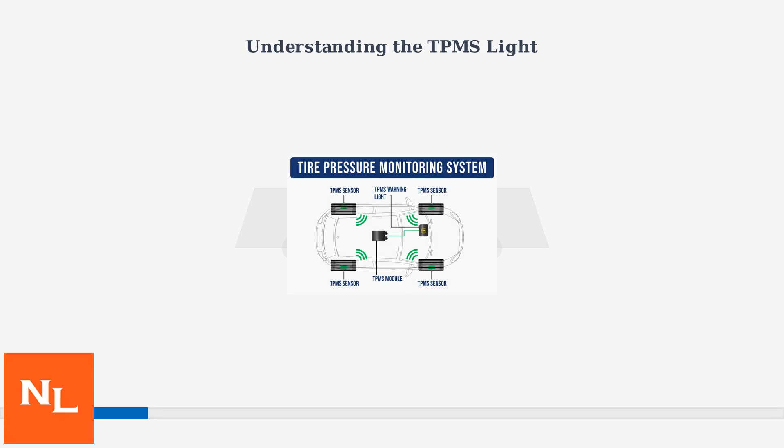The Tire Pressure Monitoring System, or TPMS, in your Toyota Tundra continuously monitors the air pressure in all four tires. When the TPMS light illuminates on your dashboard, it means the system has detected that one or more tires has pressure below the recommended level, typically 75% of the proper pressure. The light can also activate if there's a malfunction in one of the tire pressure sensors embedded in the wheels. Each wheel contains a sensor that wirelessly transmits pressure and temperature data to the vehicle's control module.

The Toyota Tundra uses direct TPMS with sensors embedded in each wheel that measure pressure and temperature, transmitting data wirelessly to the vehicle's ECU. These sensors communicate wirelessly with the vehicle's engine control unit to monitor tire conditions in real time. The TPMS light activates if any tire drops below 75% of the recommended pressure or if a sensor fails.

Regular resets may be needed after tire rotations, replacements, or pressure adjustments. Always inflate tires to the pressure indicated on the door placard before resetting.

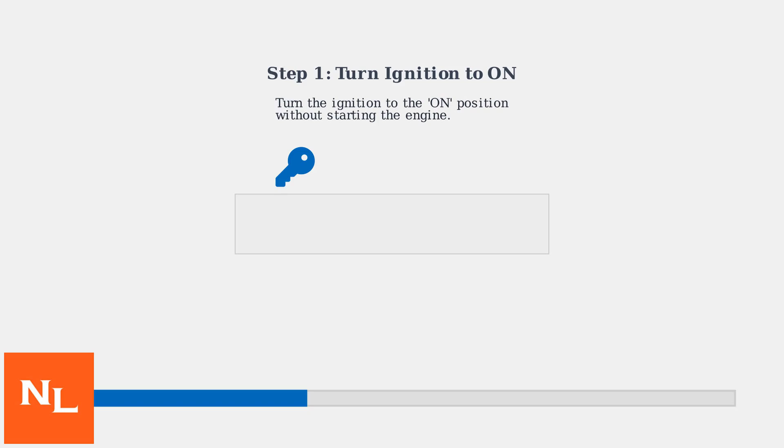For Tundra models from 2007 to 2021, start by turning the ignition to the on position without starting the engine. Next, locate the TPMS reset button. It's usually found near the steering wheel or inside the glove compartment. Press and hold the reset button until the TPMS light flashes or you hear a beep. This typically takes 5 to 10 seconds. Finally, drive the vehicle at 25 miles per hour or faster for 10 to 20 minutes to complete the reset process.

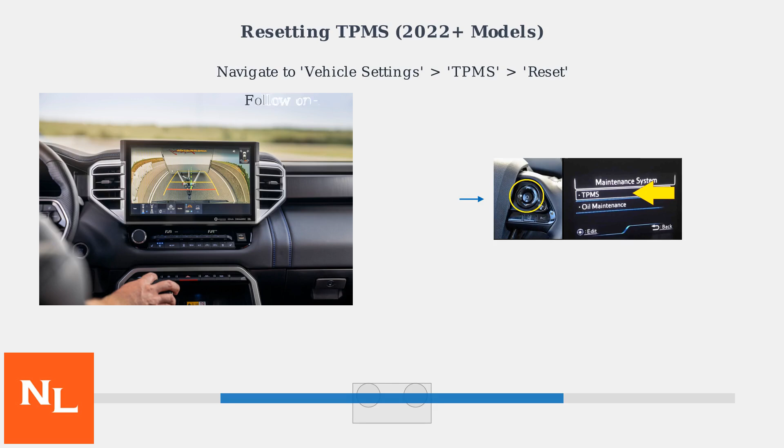For 2022 and newer Tundra models, use the infotainment screen to reset the TPMS. Navigate to Vehicle Settings, then TPMS, then select Reset. Follow the on-screen prompts to initiate the reset. After initiating the reset through the infotainment system, drive the vehicle at 25 miles per hour or faster for 10 to 20 minutes to allow the system to recalibrate.

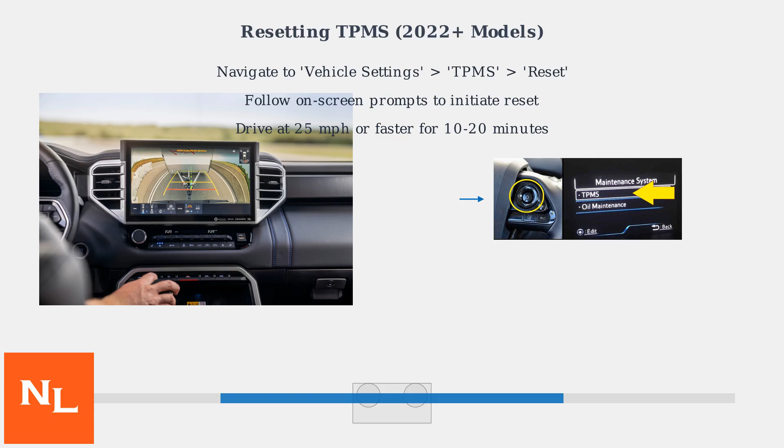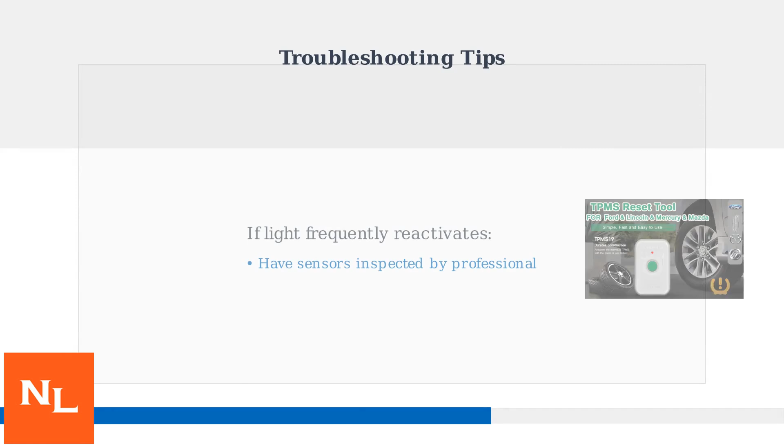If the TPMS light persists after resetting, it could indicate a faulty sensor or a tire leak. Check all tires for punctures or damage. Sensor batteries typically last 5 to 10 years. If the light frequently reactivates, consider having your sensors inspected by a professional. Some aftermarket TPMS reset tools can help diagnose sensor issues.

When resetting the TPMS on your Toyota Tundra, avoid these common mistakes that can prevent successful resets or lead to safety issues. First, failing to inflate your tires to the correct pressure before resetting is a common mistake. The TPMS system needs tires at proper pressure to calibrate correctly. Check your door placard for recommended PSI and inflate all tires before starting the reset process.

Second, using the incorrect reset procedure for your Tundra's model year can cause the reset to fail. For 2007 to 2021 models, use the physical reset button. For 2022 and newer models, navigate through the infotainment screen menus to perform the reset.

Third, avoid using excessive force when pressing the reset button. These buttons are sensitive and designed for gentle pressure. Overpressing can damage the button or cause electrical issues in the system.

Finally, never ignore a persistent TPMS light that won't reset after following proper procedures. This could signal a faulty sensor, low battery, or other tire pressure issues that need professional attention to prevent safety risks like blowouts or uneven wear.

Toyota is integrating advanced TPMS features, including Bluetooth connectivity for real-time monitoring via smartphone apps. Future trends include predictive TPMS systems that use AI to anticipate maintenance needs and potential issues. These systems may incorporate regenerative braking data in hybrid and electric models to adjust for tire heat, alerting users to potential problems before the TPMS light activates.

When attempting to reset the TPMS light on your Toyota Tundra proves unsuccessful after several tries, it's time to consult a professional. This could indicate a deeper issue with the sensors or system. If you can't reset the light after multiple attempts, or if you suspect a sensor malfunction, seek professional help. A qualified mechanic can use specialized diagnostic tools to identify the problem accurately. The mechanic can then replace any faulty sensors to ensure your TPMS system functions properly. This professional service helps prevent further complications.

Ignoring a persistent TPMS light or recurring issues can lead to safety hazards, such as uneven tire wear or potential blowouts. Don't take chances with your vehicle's safety. Professional dealership resets typically cost between $50 and $100, but this investment ensures your TPMS system is properly calibrated and safe.